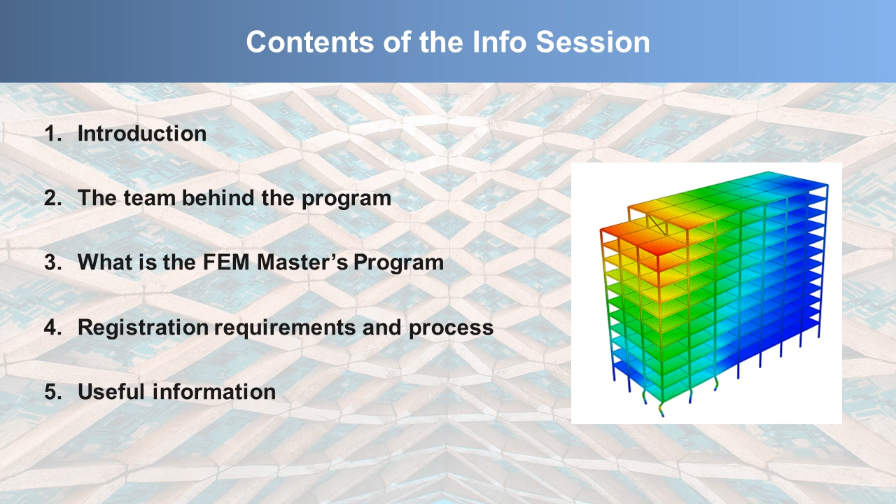We will outline the objectives and structure of the master's program as concisely and clearly as we can. Let's get started. I will cover each of the areas shown on your screen. I will outline general context, go over the features of the program, the different degrees, branches and options available, as well as the course structure, the modules which can be taken, and the methodology applied. I will also give you some background information on the program and the team behind it. Towards the end, I will draw your attention to the master's calendar, registration dates, and secretariat contact details.

Attendees on the master's program are mainly from two areas. One, professional engineers working in the industry who want to enhance their CAE skills. And two, new engineering graduates and graduates from other science branches. The masters not only provide you with an in-depth understanding of the finite element method and the necessary tools to use it, it also trains you how to apply the knowledge directly in engineering companies, in areas of scientific research, and other advanced studies related to this field.

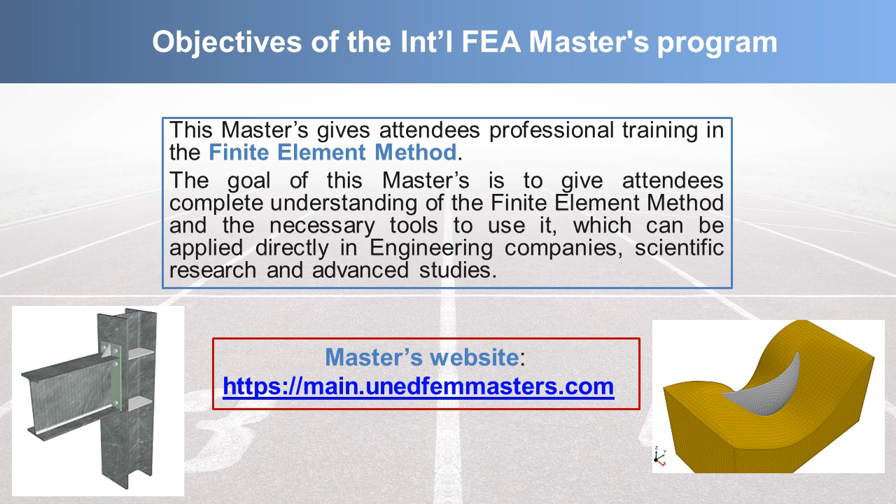For UNED and INGECIBER, it marks an important milestone on the journey together and their unwavering commitment to excellence in teaching, research, and innovation in the different engineering fields. The program is not the work of any one person or organization, but the combined efforts of many engineering companies, university engineering faculties, and multiple professionals. It is why the International Masters is widely acclaimed by experts in the industry worldwide.

In the early 90s, the need for specialists in the use of FEM and CAE simulation for practical professional applications was clearly identified. It was then that INGECIBER approached UNED with the idea of formulating a master's degree program. A select team of highly experienced engineers and senior professors came together and designed a pilot study program. It was enthusiastically welcomed by the industry, and within a few short years, it evolved into the International Masters in Theoretical and Practical Application of FEA and CAE simulation.

Through the program, UNED and INGECIBER have engaged with industries, governments and universities all across the world. The partnership has developed important relationships with a select team of global technology and business partners.

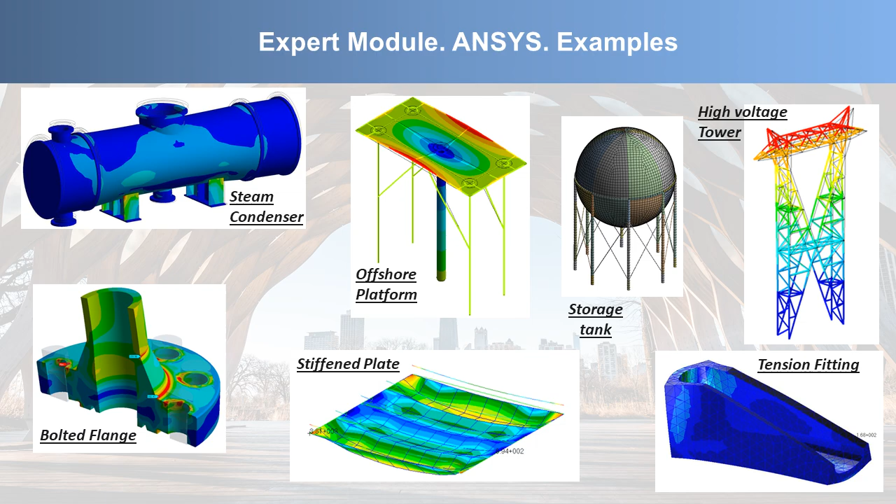In all cases, checking of the structures under operation loads is very important to validate the design. For example, internal pressure in the storage tank. Combinations which are usually calculated due to norms are also obtained. If you advance to the specialist degree, you have specialized modules to choose from. The specialized modules are dynamic analysis, non-linear analysis, heat transfer analysis, fluid mechanics and composite structures.

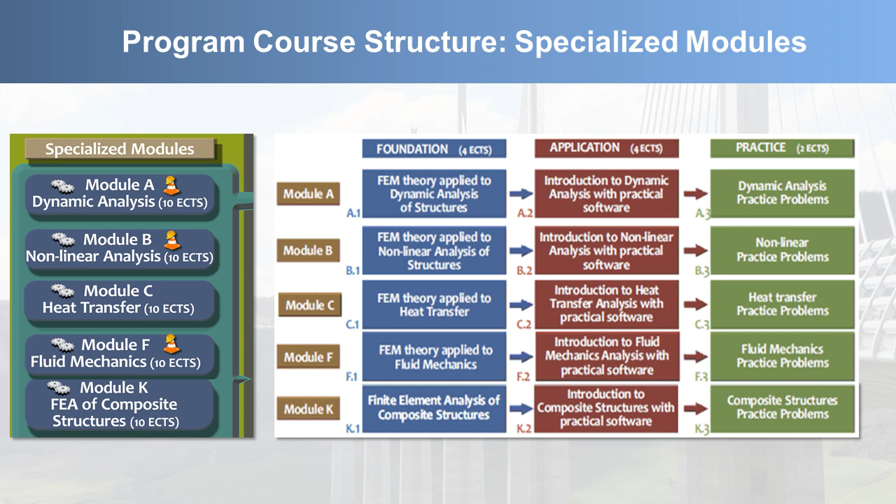All modules have a foundation subject and 2 application and practice subjects to help you gain experience with the specific software of your branch. In the next slides, the modules are briefly presented. More complete information about the subjects and modules is set out in the attendees guide on the master's website.

The dynamic analysis module, available to both engineering branches, includes the study of dynamic phenomena that are present in structures or equipment. The initial objective of the fundamental subject is the analyzing of the dynamic problems that arise when calculating a structure. It also provides criteria to resolve them by focusing on specific structural types and providing the essential concepts while identifying the fundamental parameters which characterize the dynamic behavior of structural systems.

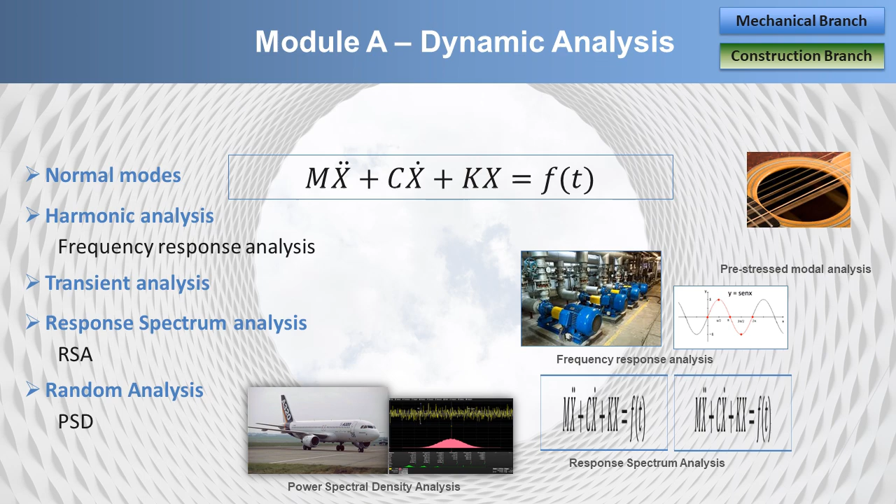The application and practice subjects introduce you to the concepts of dynamic analysis of structures. Dynamic analyses such as modal analysis, harmonic analysis, spectrum analysis, random analysis, and transient analysis are studied during the course and are applied to real problems using the FEM software.

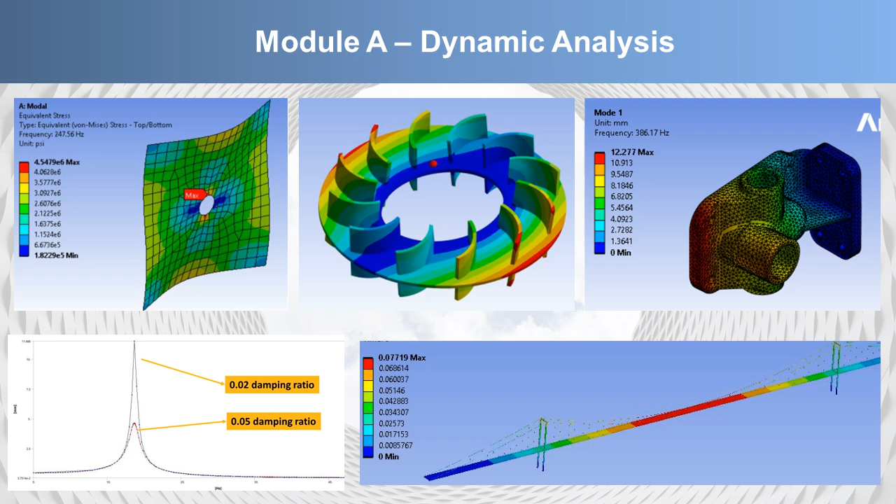The study of this module will help you to understand and learn how to create and analyze dynamic cases of finite element models such as seismic studies of components, buildings or dams, and forced vibration studies in different industries: automotive, aerospace, energy, marine, civil, etc.

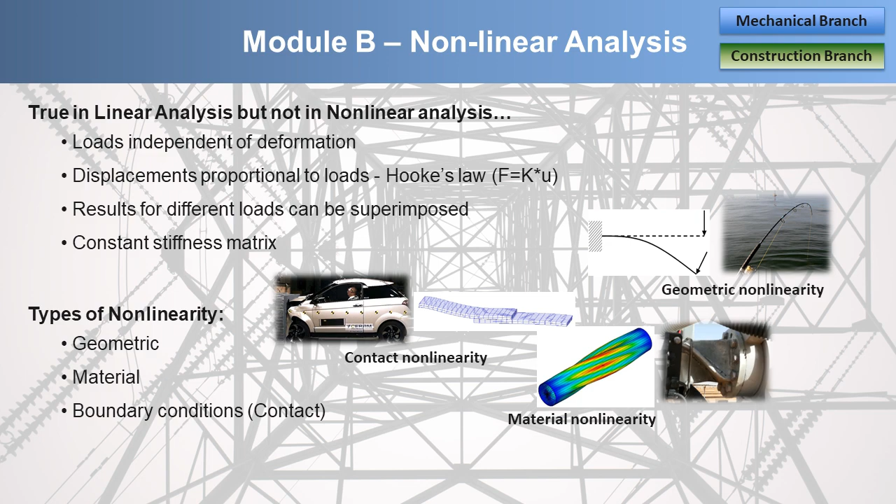The purpose of the nonlinear analysis module is to study the nonlinear problems associated with structures. All the main nonlinearities present in reality, like strains and displacements, material and contact, are included. A complete understanding of this behavior is achieved with the study of the concept of nonlinear structures, the kind of problems that require a nonlinear analysis, the causes of nonlinear behavior, and the differences with linear analysis and the characteristics of nonlinear analysis using finite elements.

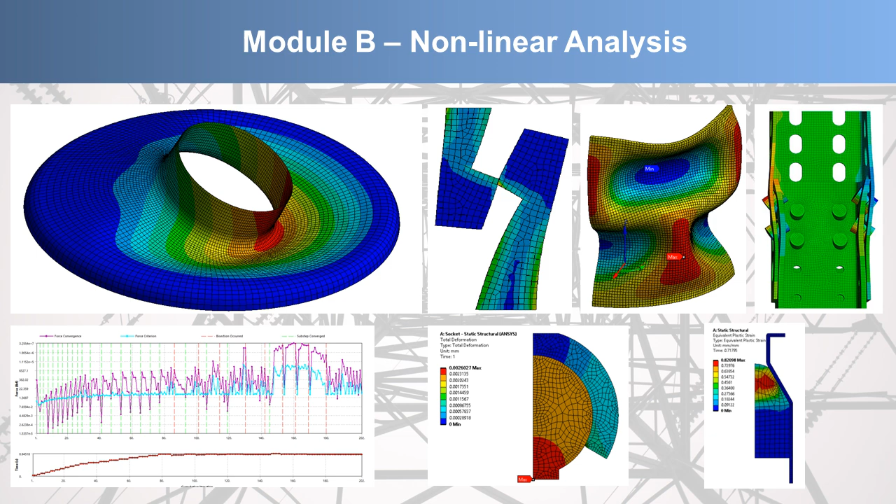All of the concepts and the study of these behaviors are applied to real problems in the application and practice subjects using the finite element commercial software. The study of this module helps you to understand and learn how to create and analyze nonlinear finite element models, such as in contact mechanisms, nonlinear buckling analysis in structures, construction processes, nonlinear materials, and geometric nonlinearities, etc.

The aim of the heat transfer module is the study of heat transfer phenomena. The fundamental subject provides the theoretical knowledge about heat transfer necessary for a specific application in the resolution of general and finite element heat transfer problems, as well as in stationary or non-stationary systems.

In the application and practice subjects, you come into contact with and manage, from the perspective of conducting analysis using finite elements, the basic concepts of heat transfer such as conduction, convection and radiation, while at the same time solving stationary or transient heat transfer problems and other peculiarities of thermal processes, which can be treated like nonlinearities.

The study of this module helps you to understand and learn how to create and analyze heat loads in finite element models such as thermal studies of heat exchangers, thermal studies in electrical components, thermal behavior of pressure tanks, etc. Some heat transfer analysis examples which are solved in the practical subjects of this module are the thermal analysis of a finned tube, a heat sink design procedure, a radiation analysis of a system or the thermal stresses in a section.

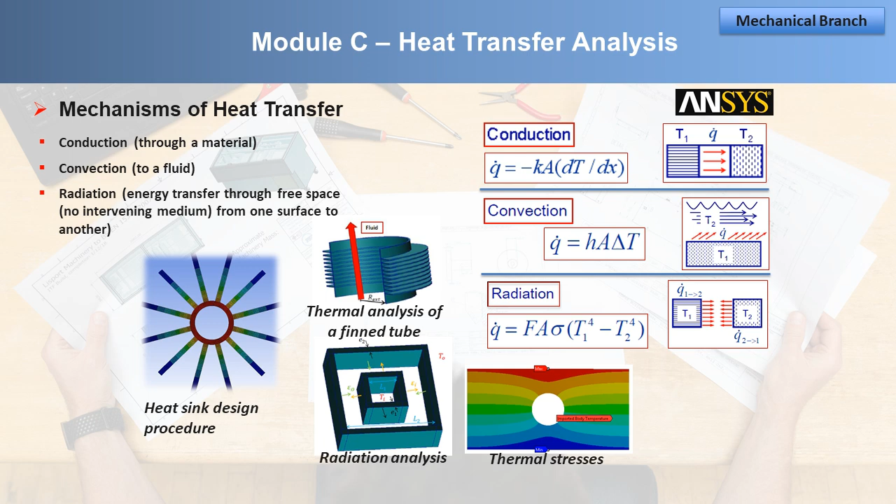The fluid mechanics module studies problems associated with fluid mechanics, including their characteristics and modelization in order to analyze them using CFD simulations. The theoretical subject studies the fundamentals of fluid mechanics with a particular emphasis on deduction and analysis of mass conservation equations, movement quantity and energy. Furthermore, the characteristics of different flow types are described and the conditions in which the different simplified shapes of general equations can be applied are discussed. Lastly, the finite volume method is applied to some of the flow types studied.

The application and practice subjects of this module are studied with ANSYS, helping you to understand the main approaches used in CFD simulations. Mesh-based CFD techniques are studied with ANSYS along with previous specific training in CFD geometry pre-processing procedures.

The study of this module helps you to understand and learn how to create and analyze computational fluid dynamics models such as aerodynamics studies in automotive, structures or aerospace, internal flows in heat exchangers or valves, hydrodynamic studies in the marine industry or water management, ventilation studies, behavior of wind turbines, multi-fluid flows, etc.

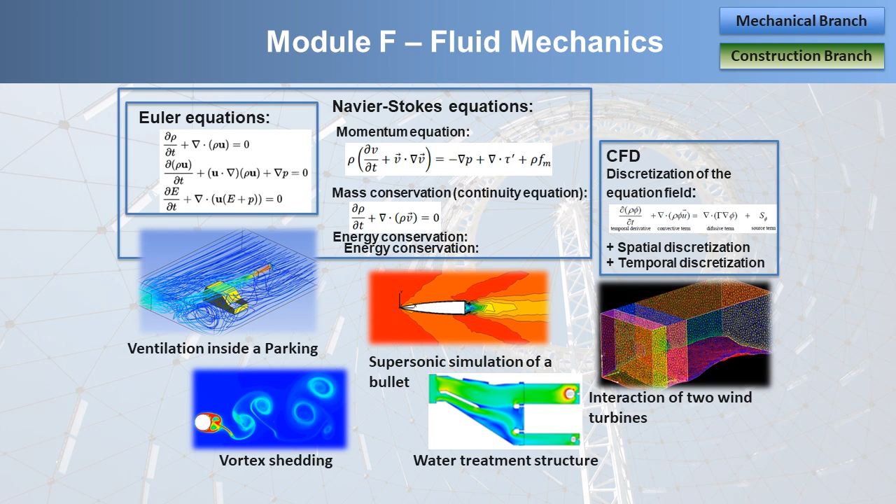The aim of the finite element analysis of composite structures module, only available in the mechanical branch, is to introduce you to the concepts and analysis of composite structures. The theoretical subject first studies the composite structures from an analytical point of view, from simple to more complex composite structures, while also presenting common failure criteria and general design concepts and their comparison against experimental data, from which the theories that are applied to the study of this particular field are derived.

The second part of this subject introduces how this type of material is treated in a finite element code. The application and practice subjects help you to manage the analysis of composite structures with the commercial software ANSYS. The study of this module helps you to understand and learn how to create and analyze composite finite element models such as aeroplane fuselages, high-level sporting materials, automotive parts, wind turbine blades, etc.

Some interesting examples of composite structures which are solved during the study of this specialized module are the stress concentration study of a pipe joint, the analysis of a composite aircraft wing, or a composite beam.

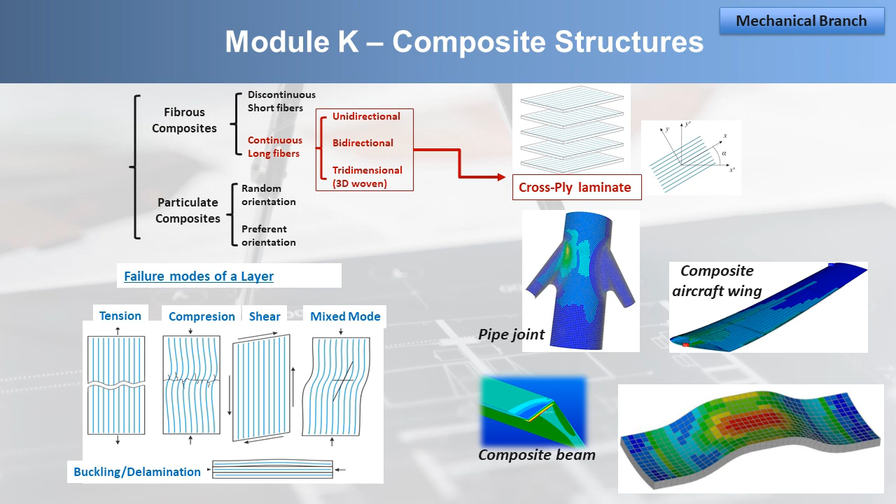The Theoretical and Practical Application of the Finite Element Method and CAE Simulation Master's Program concludes with the final project. This project combines all the knowledge that has been acquired throughout the study phase of the expert and specialist modules and aligns all their aptitudes and capabilities under a common goal in a single project. A tutor is assigned to each project, depending on the areas involved, to guide you during the project process. The project can be proposed by you based on your professional experience or chosen from the master's official list.

At this point, I will give you useful information on the program calendar and important dates, candidate requirements, the registration process, and scholarships and fees. Enrollment is now open. It is recommended to register early to facilitate the necessary confirmations and the payment of fees, etc. The expert module starts in February and finishes with the final exams in October. The specialized modules and the master's final project start in May, finishing with the exam period in November. Attendees who were not successful or were unable to take the first exam call of the expert module can take advantage of the second call.